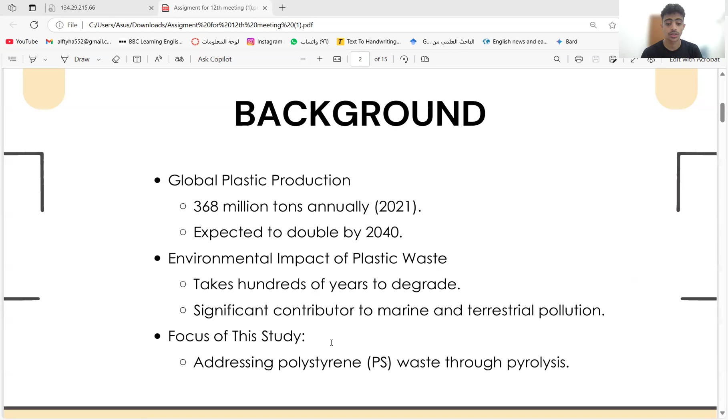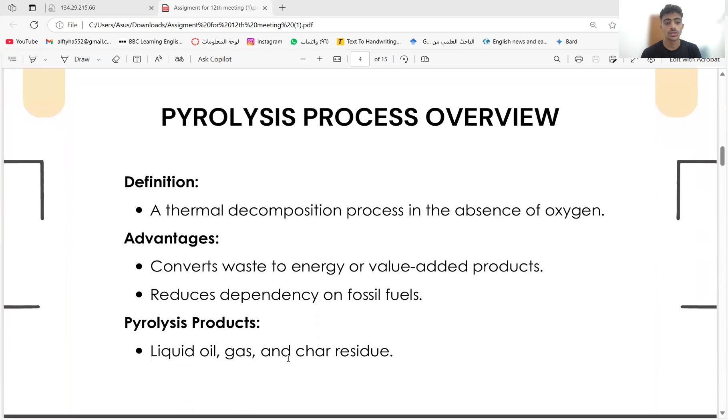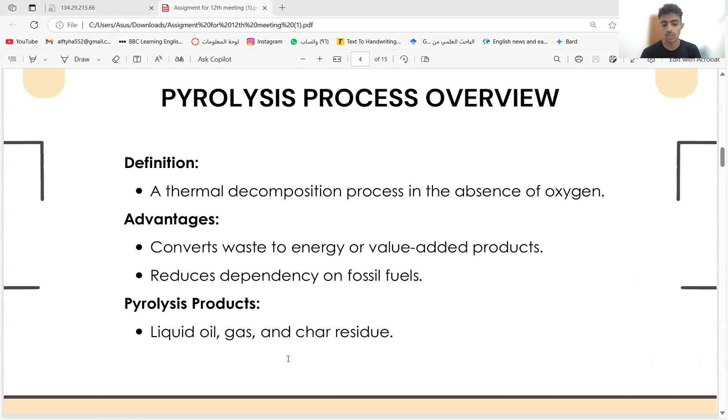Okay. Now, a pyrolysis process overview. The definition is a thermal decomposition process in the absence of oxygen. And the advantages: the first advantage is it converts waste to energy or value-added products, so it reduces dependency on fossil fuels. The pyrolysis products are liquid oil, gas, and residue.

Okay, the materials used: the types of polystyrene, which are expanded polystyrene (EPS), virgin polystyrene (VPS), high impact polystyrene (HIPS), and polystyrene containers (CPS). The collection is from households, institutions, and packaging sources. And after that, the preparation, which is cleaning, shredding, and melting to reduce volume.

As we can see here, in table one, which is the proximate and ultimate analysis of PS waste. So for the proximate analysis, we have moisture, ash, volatiles, fixed carbon. The percentage for moisture is 0.28%, for ash is 0.84%, the volatile is 94.33%, and for fixed carbon is 4.55%.

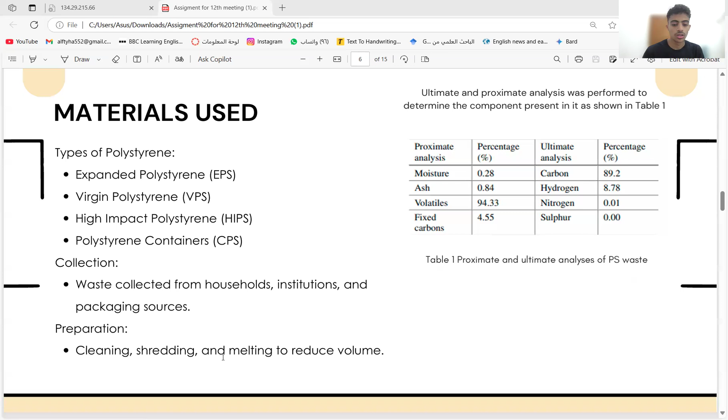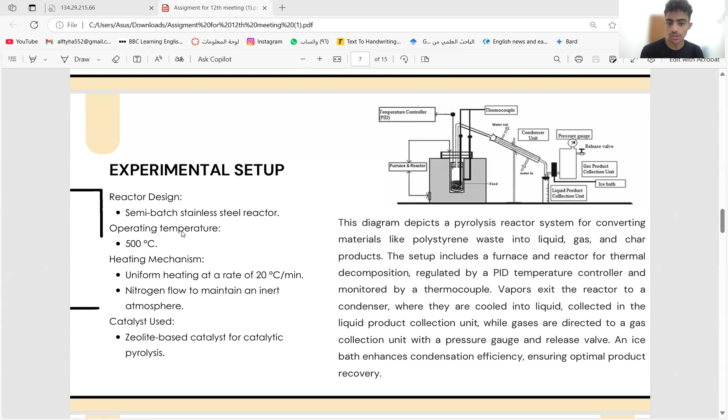Okay, here is the experimental setup. Actually, the reactor design will be a semi-batch stainless steel reactor, and the operating temperature is 500 degrees Celsius. After that, the heating mechanism: uniform heating at a rate of 20 degrees per minute, and nitrogen flow to maintain an inert atmosphere. After that, the catalyst used: we have zeolite-based catalyst for catalytic pyrolysis. And we can see here the reactor, I mean, this diagram.

Actually, this diagram depicts a pyrolysis reactor system for converting materials like polystyrene waste into liquid, gas, and char products. The setup includes a furnace and reactor for thermal decomposition, regulated by a PID temperature control and monitored by a thermocouple. Vapors exit the reactor to the condenser where they are cooled into liquid, collected in the liquid product collection unit, while gases are directed to a gas collection unit with a pressure gauge and release valve. An ice bath enhances condensation efficiency, ensuring optimal product recovery.

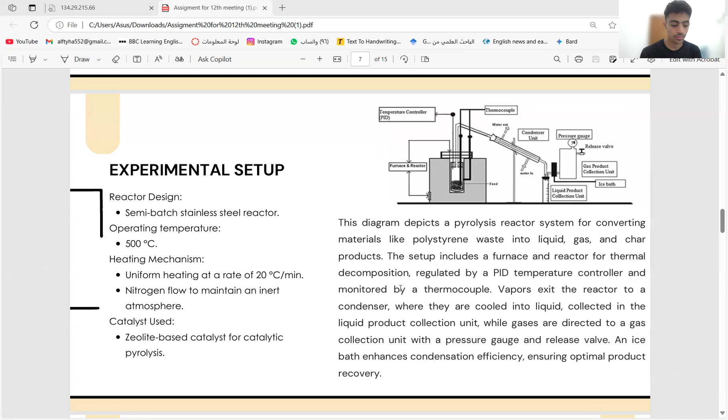Okay, for analytical techniques: proximate and ultimate analysis, so elemental composition, CHNS analysis, and moisture, ash, and volatile matter. For the thermal degradation study, thermogravimetric analysis, TGA, at various heating rates. For gas and liquid characterization, GC-MS for composition, and gas chromatography for gas products.

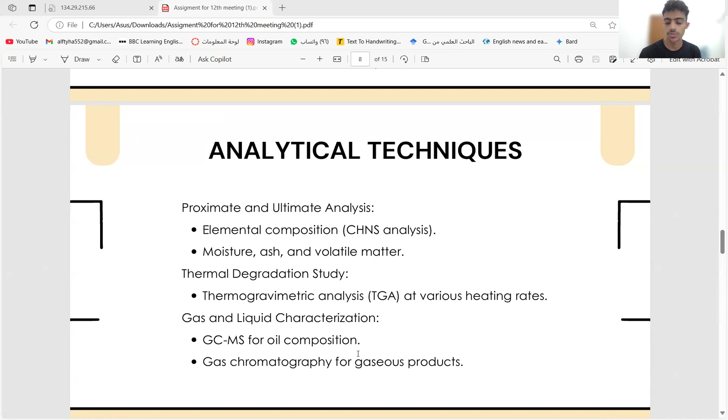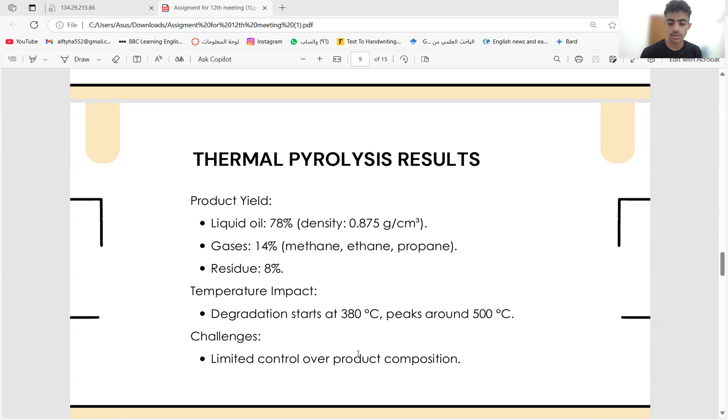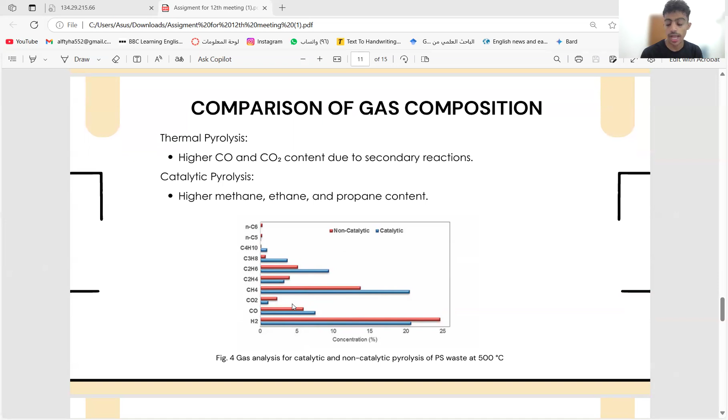Okay, now the comparison of gas compositions. Thermal pyrolysis has higher CO and CO2 content due to secondary reactions. Catalytic pyrolysis has higher methane, ethane, and propane content. As we can see here in figure 4, which is the gas analysis for catalytic and non-catalytic pyrolysis of PS waste at 500 degrees Celsius, you have higher methane, ethane, and propane.

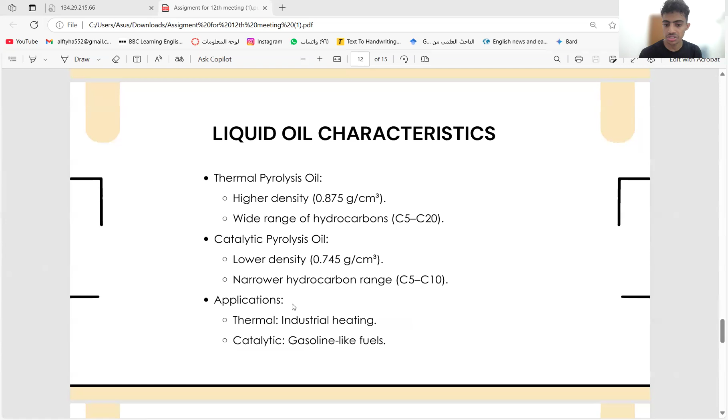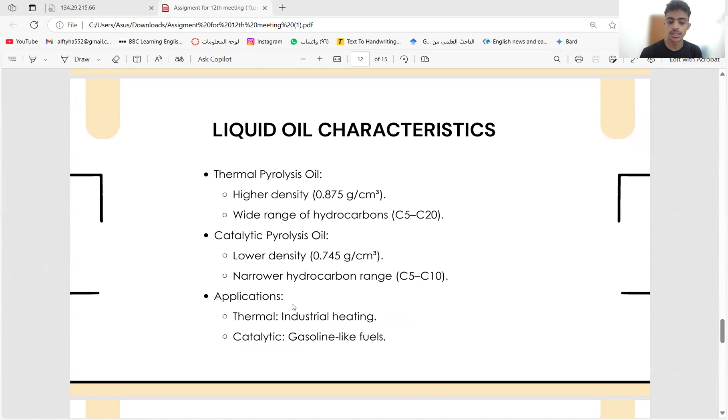Okay. Now for liquid oil characteristics, the thermal pyrolysis oil has higher density, as I said before, 0.875 grams per cubic centimeter, and a wide range of hydrocarbons, C5 to C20. The catalytic pyrolysis oil has a lower density of 0.745 grams per cubic centimeter, and a narrower hydrocarbon range, C5 to C10. The applications are: thermal for industrial heating, and catalytic for gasoline-like fuels.

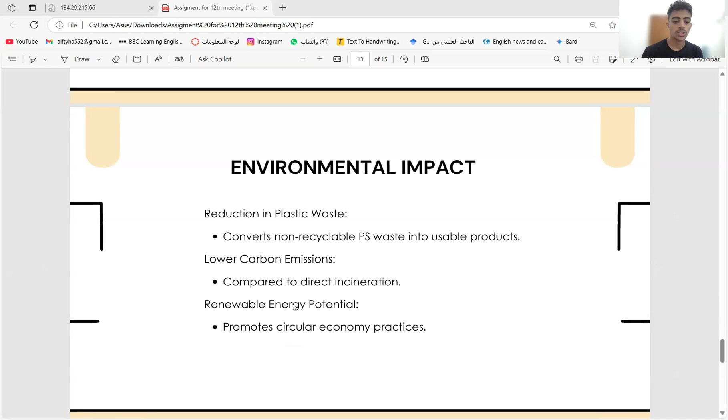Now for environmental impact. The reduction in plastic waste: it converts non-recyclable PS waste into usable products. Lower carbon emissions compared to direct incineration, and also renewable energy potential, which promotes circular economy practices.

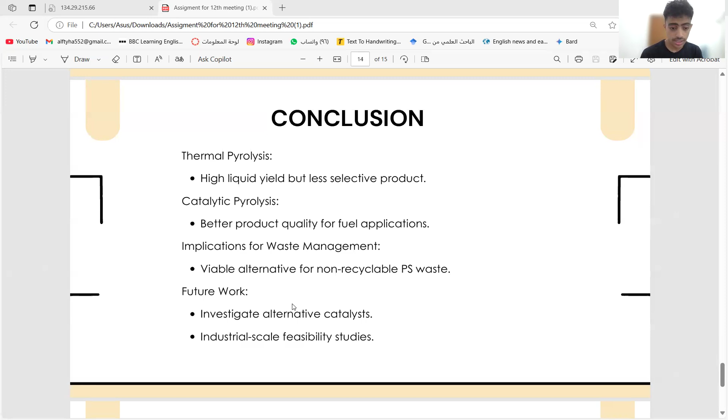Conclusion: thermal pyrolysis gives a high liquid yield but a less selective product. Catalytic pyrolysis gives better product quality for fuel applications. And the implications for waste management: a viable alternative for non-recyclable PS waste. And future work is to investigate alternative catalysts and also industrial scale feasibility studies.

Thank you so much. That was my presentation about catalytic and non-catalytic processes. If you have any questions, please let me know.